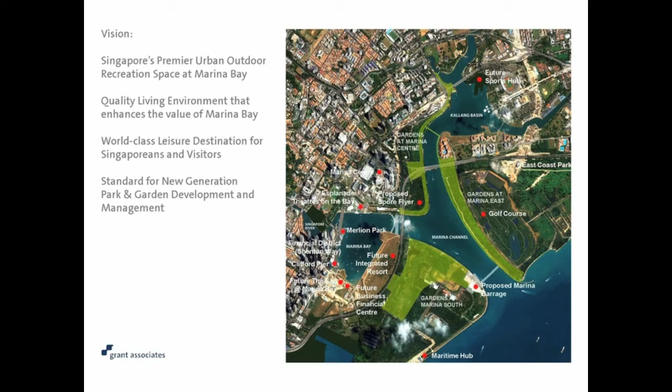The client has set very ambitious objectives for the project. They want it to become one of the premier tropical garden destinations in the world, but also the favourite place for Singaporeans to go as an outdoor recreational space. It's an amazing setting, set in the heart of the new development area of Marina Bay, adjacent to the Marina Bay Sands integrated resort that's recently opened, and the emerging new finance city and future development areas for central Singapore.

From the outset, we knew we wanted to do something very organic and very in tune with the environment of Singapore. After thinking about it very hard, we thought the orchid was a very interesting conceptual reference point for the scheme. The orchid being the most cosmopolitan of species in the world and epiphytic, i.e. it can colonize a place in an interesting, challenging environment.

So we established a series of little diagrams that started to suggest how the orchid as a reference could structure the gardens. The idea of the infrastructure taking root on this new bit of reclaimed land, the stems growing from that to become the path network and linking to the city, and then the flowers themselves becoming the special gardens.

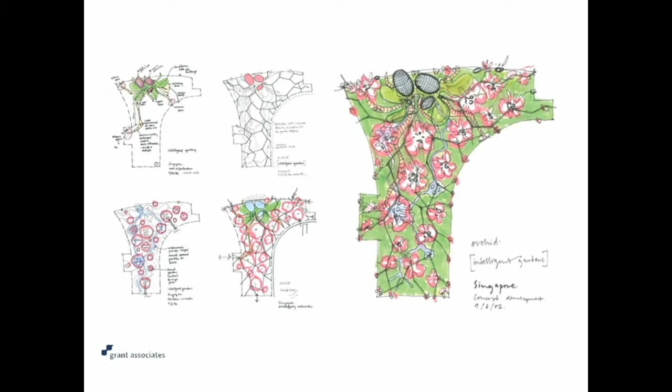Slide 4 shows you a very early quick sketch showing how this might actually work its way through the garden. The overall size of the garden is 54 hectares, so we have a lot of space to use and to generate a very interesting, rich mix of activities within the park.

This ranged from more traditional things like big open spaces, walks through beautiful gardens, lots of shaded walkways. But right on the waterfront, there are two shell-shaped buildings, the landmark buildings for the project. Two air-conditioned conservatories which would support plants from the Mediterranean world and plants from the cloud mountain environment of the tropics. These would become key elements in the project.

Slide 5 shows the competition layout for the project and how that early concept had taken root in the scheme. The green leafy shapes indicate earthworks which start to define spaces and shape and nurture breezeways through the site. And you can see clearly the pathway network and the series of gardens arranged around the site.

A very important part of it was the linkages to the rest of the city and the idea of using water in an imaginative way. There's a 1 kilometre long lake along the western edge of the site, creating an amazing new setting for the emerging development on that side of the project. On the eastern side you can see a little spiral building, the Marina Barrage, and basically the whole of the Marina Bay environment has been becoming a freshwater reservoir for Singapore. So this project plugs into that, as part of the overall environmental improvement strategies for this part of Singapore.

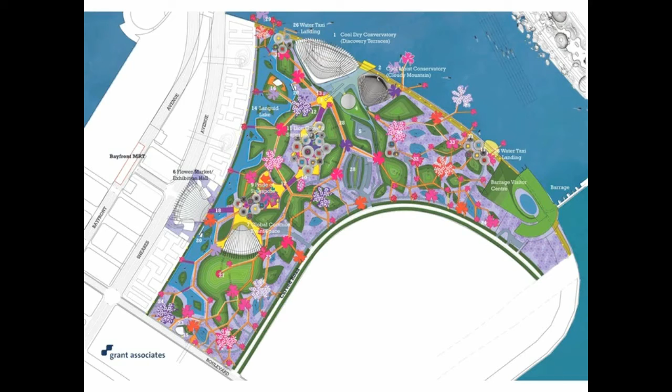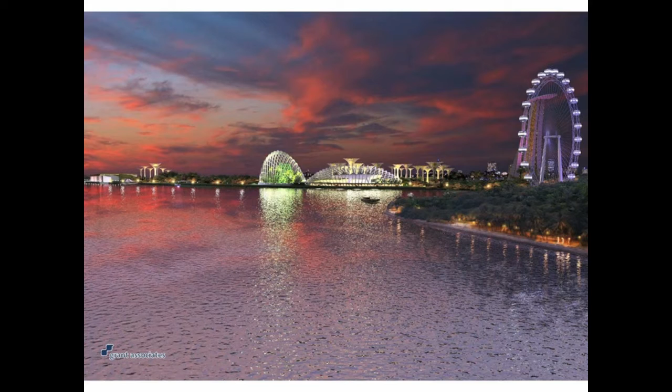Slide 8 shows how these new amazing structures might appear on the skyline at night. Nighttime is a really important part of the environment and experience of Singapore - it's a little bit cooler, people walk and get outside a little more and enjoy going for walks or dinner or having some drinks. We wanted to create a destination that everybody would want to go to.

Slide 9 is a diagram of the ecosystem for this project. This is an early sketch we did to start exploring how we could tie and integrate some of the environmental systems together on this project.

It seemed very fundamental to us that the idea of an air-conditioned conservatory in the tropics was going to be a challenging issue from a sustainability point of view. At the same time, we could see it had the potential to generate new ideas and new approaches to how you condition major buildings.

The brief was that this building should not use any more energy than a conventional office building of the same size. So Atelier Ten, our environmental engineers, looked at this with us to find some innovative solutions, and also a way of making the gardens work with the buildings. There's some really integrated systems going on, and we'll talk about that a little more later in the presentation.

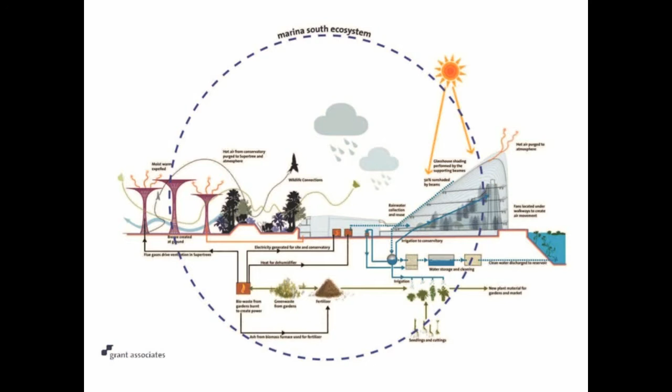The master plan evolved to create a much more balanced approach to the way the path networks and main spaces work, but still keeping that original concept, the idea of the orchid underlying the whole approach to the project.

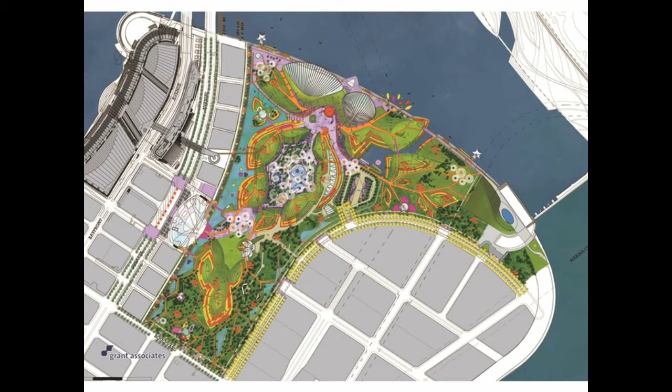On this plan, slide number 10, you'll see the 2 conservatories by the waterfront, and then 3 or 4 clusters of circles, which are the Supertrees. They're becoming some landmark orientation devices in the plan.

Slide 11 became a very significant image for us, because what we wanted to do was embed some significance in the way the gardens developed and the narratives that were underlying them.

The red areas represent plants and people, the idea of ethnobotany and exploring the association of plants with the different cultures of Singapore. The green areas, plants and planet, the idea that we want to explore a Southeast Asian rainforest.

We really want to unlock and display the wonderful plants and phenomena and special features of such a forest, from biodiversity all the way through to the fruits and flowers and significance of trees. The orange spine is that fusion between nature, art, and technology, of which the Supertrees become a very particular icon.

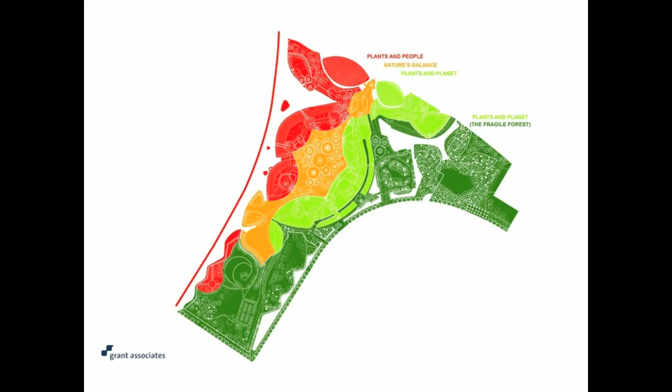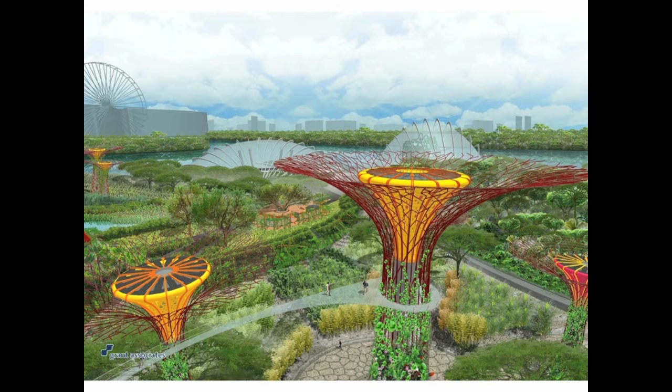Slide 13 starts to show how some of these things work together. Similarly on slide 14, how these major structures sit within a new landscape.

We're going to talk a little about the conservatories now, slides 15 through to 19 - really just a series of images that show how the conservatories sit on the waterfront, and how the identity of the landscape behind and within the conservatories becomes a very important part of the language of the site.

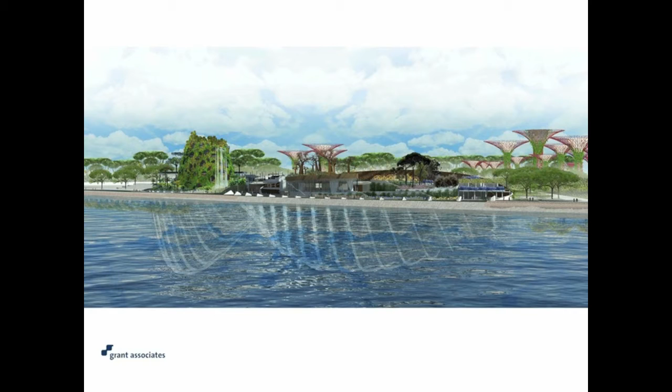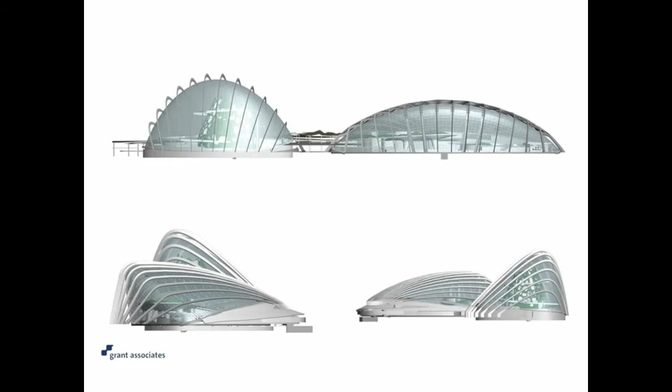The architects for the conservatories are Wilkinson Eyre Architects in the UK, and they've come up with these amazing, beautiful forms, which are a response to trying to maximise the light that gets into the conservatory, while minimising the structural elements that enclose it, and trying to give each conservatory a different character.

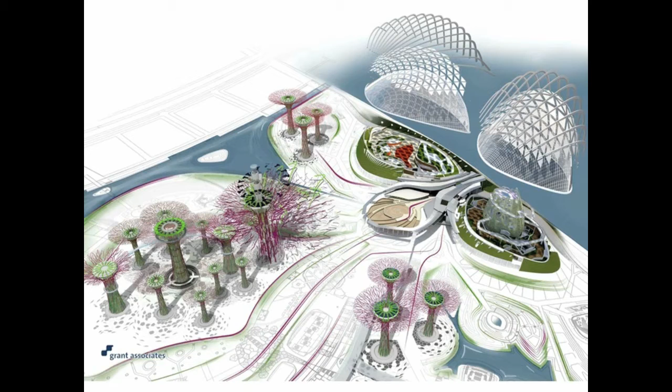Slide 19 shows how we began to draw the relationships between the conservatories and the gardens, specifically the conservatories and the Supertrees, and you can start to see some of the richness of the elements that are within that.

Slide 20 is the engineer's version of our early concept plan, which starts to set out how the energy systems work. I don't have real time to explain all of the technologies, but suffice to say there's some very interesting energy efficient systems in here.

The engineers are pretty confident that the running of the cooled conservatories is effectively a carbon neutral process, principally using a biomass fuel system taken from tree clippings from the rest of Singapore, and enhanced by some of the environmental systems on the Supertrees, including photovoltaics and rainwater harvesting, etc.

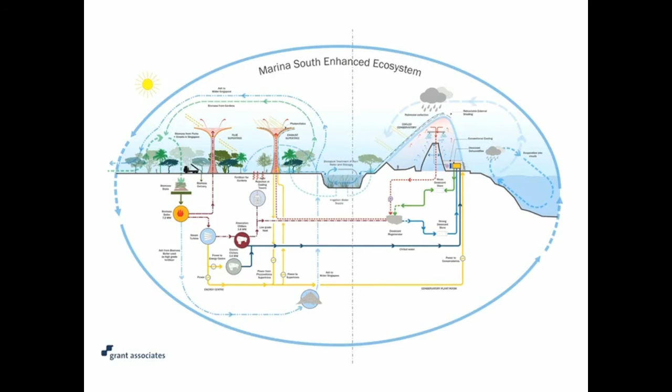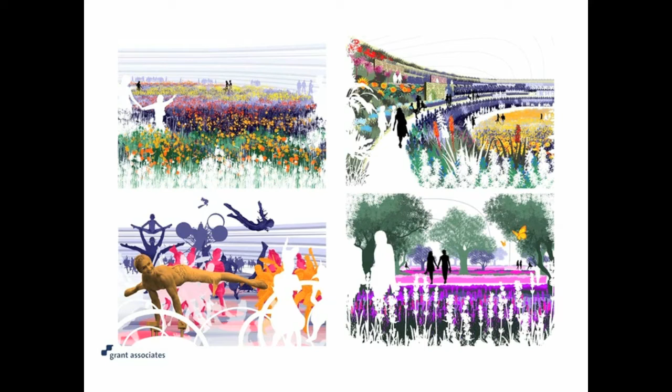Slides 22 through to 24 start to illustrate how some of these early concepts worked.

Slide 24 shows the idea that the interior of the cool dry set out a series of themed terraces developed around particular regions, including the Mediterranean, California, Chile, South Africa, and particularly an element, a collection of baobabs and other bottle trees from different parts of the world on the baobab leaf, elevated above a main function space.

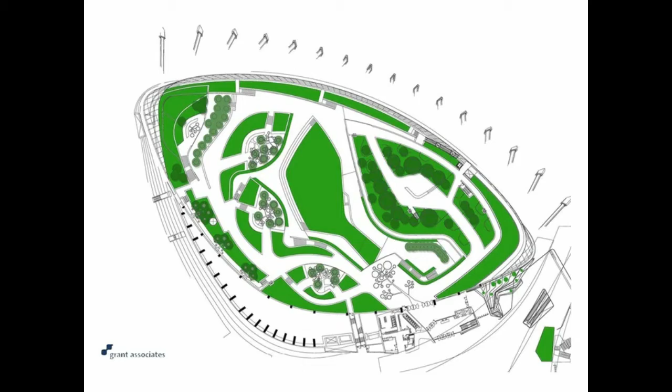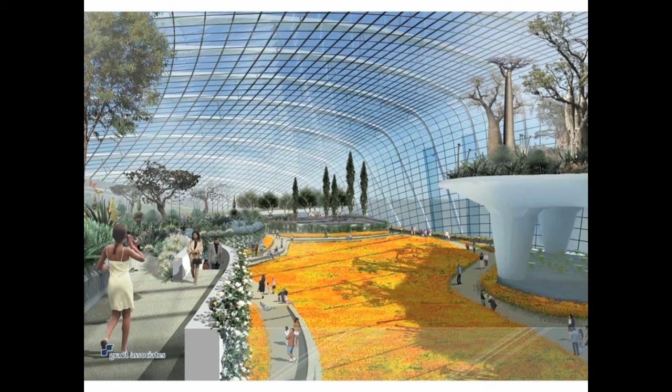That's illustrated on slides 25, 26 and 27. The heart of the site of the Cool Dry is a flower field, the opportunity for a changing display of flowers within the heart of this amazing structure. Slide 28 shows the baobab leaf, an amazing collection of plants from that part of the world. 29 is the olive terrace, plants from the true Mediterranean.

Slide 30 shows the baobab leaf elevated above the flower field. 31, 32, 33 are some recent images of the planting going into the Cool Dry Conservatory, some of the amazing specimens that NParks have brought from around the world, all starting to take shape.

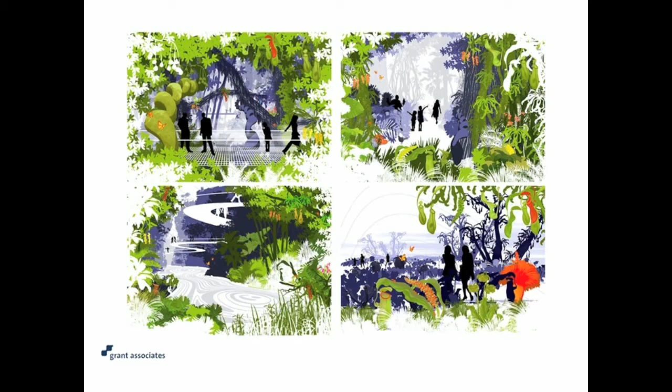Slide 34 starts the story of the Cool Moist Conservatory, which is more about cloud forest plants from tropical montane areas. Both the Mediterranean zones and the tropical cloud forest zones are very threatened habitats, and that's one of the ideas the National Parks Board had, to find a way of displaying plants from these very threatened, fragile environments.

Some of the early sketches are identified on slide 35, and on 36 you can start to see the organisation of the interior of the Cool Moist Conservatory.

Between them, the two conservatories cover around 2 hectares in area. The Cool Moist is a little smaller in footprint but a bit taller, because at the heart of it is a mountain, an artificial mountain on which we want to display the amazing world of epiphytes from cloud forest environments.

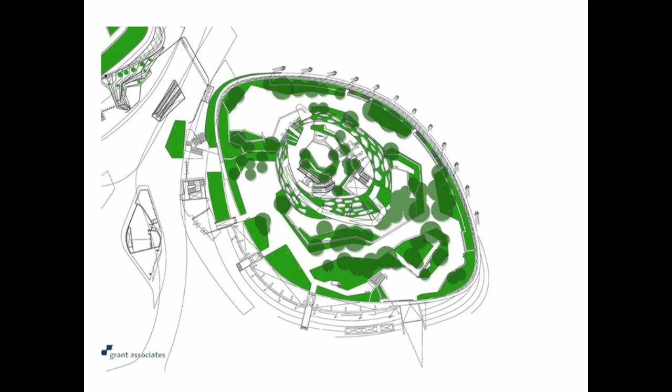But also, you can see on slide 37 the idea that we want to show the profile of a rainforest from these areas, show the different canopy layers, and take elevated walkways through these spaces so that people can really appreciate them.

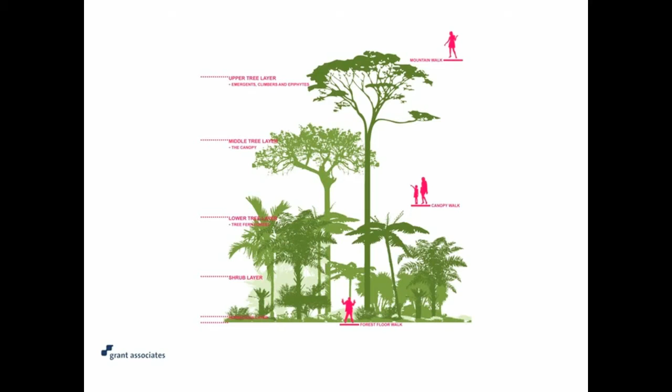And 38 starts to introduce you to the mountain, the idea that at the heart of this Cool Moist Conservatory is this quite significant structure, which is almost like a building in terms of its interior organization. It's actually a gallery space, a circulation structure.

With multimedia displays and interpretation of these environments going on within the various rooms and structures within there, but clothed in this amazing lattice structure, covered with green, multicolored epiphytic plants, and a big garden on top called the Lost World.

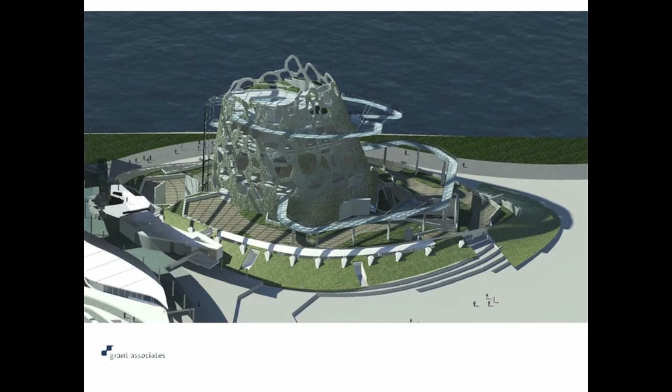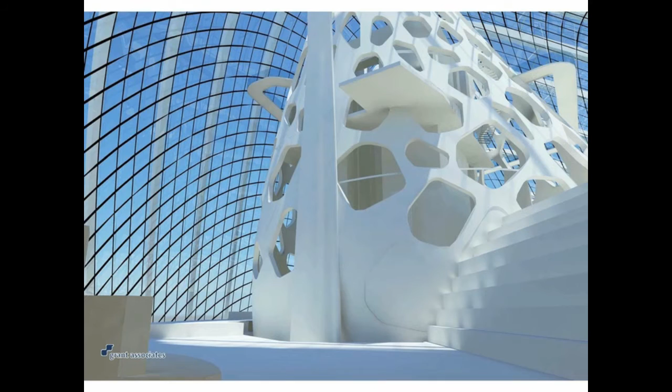So the next few slides start to show some elements of this structure. 39 and 40 show the basic skeleton of the conservatory and the mountain. 42, 43, 44 begin to show different parts of how the skin, the life, the planting is envisaged on that.

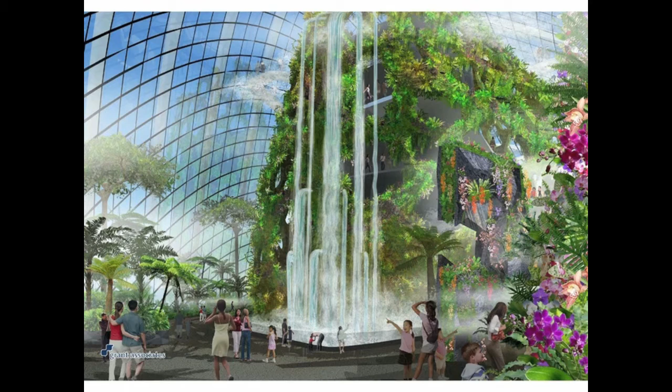From the outset we recognised that this was a very significant technical challenge, and one of the incredible things we have to do is find a way of clothing this mountain with plants, which we'll go on to in a minute.

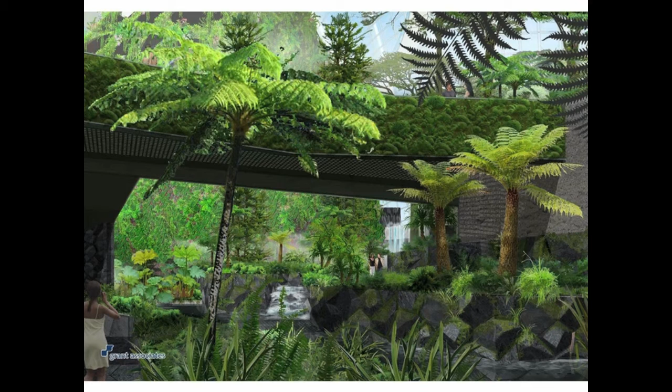Slide 43 is an image of the top of the mountain, the Lost World, where we imagine the opportunity to really create something very unusual and take people into a world of plants, possibly pitcher plants, possibly other species from the top of a mountain in a tropical montane area.

Slide 44 introduces the conceptual origin of the mountain. We didn't want to just make a GRP lump with some plants on it. We wanted to do something really interesting, the idea of a very efficient structure, so it wasn't 100% just concrete or structural, something that actually allowed us to create a structural lattice, but with enough surface area on that lattice to show off the planting.

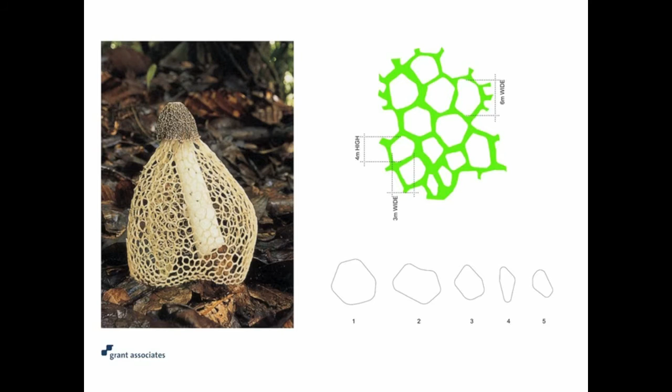The shape of the mountain, what form we wanted, the scale of it, took a lot of developing. So 45 and 46 start to indicate some of the early technical studies of how this worked, taking the idea of the lattice structure and turning it into a three-dimensional idea.

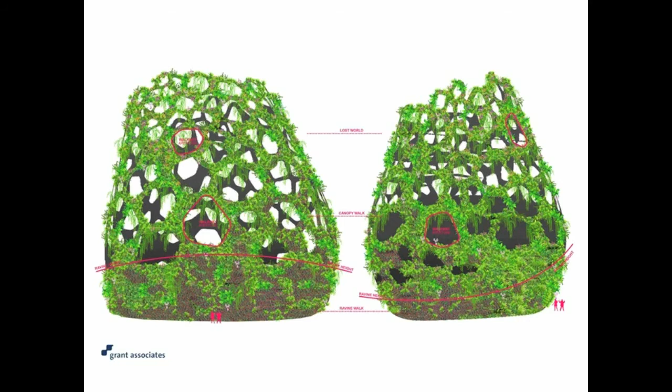But also we wanted to make sure that it was working from the interior spaces too, so how do we make sure that the organisation of the mountain itself worked.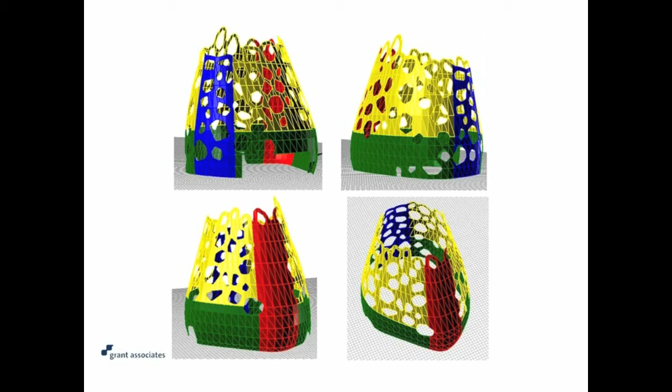The waterfall dropping down from the Lost World to the bottom, about 35 meters, also needed something different in its approach. Slide 50 is like a peeled open version of the mountain.

We were looking at different techniques for how we could actually plant this, and after thinking carefully, since it's a very large surface area, we needed a relatively low-tech solution. Rather than a high intensity panelized system, which would be very hard to fabricate to fit the geometries of this 3D organic structure, we thought we'd make it much simpler.

Various places in Singapore, particularly the Botanic Gardens, have been experimenting with what we call a render solution. It's an organic, rich render with lots of porosity, allowing rooting into the surface and moisture retention. That seemed to us to be a good way of starting.

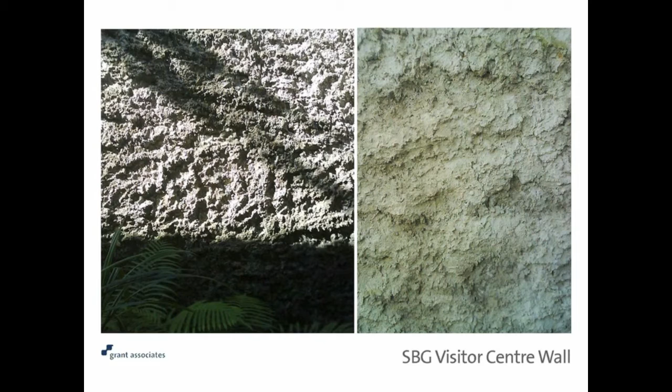Slide 54 shows a range of different planting options. In addition to the render itself, we could imagine a series of planting pockets and little planting devices within and around the lattice holes, giving us an extra dimension, sometimes allowing even small trees or large shrubs to be planted in some of the holes and planters.

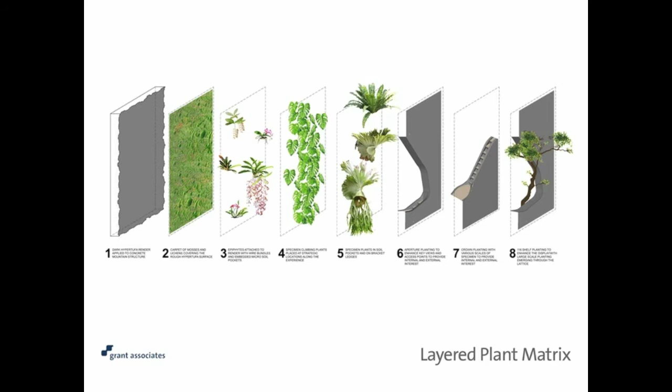Slide 56 through to 57 start to show some of the images we were trying to get across, the idea of epiphytes, the idea of a lot of moss, and how we start to articulate that in the structure.

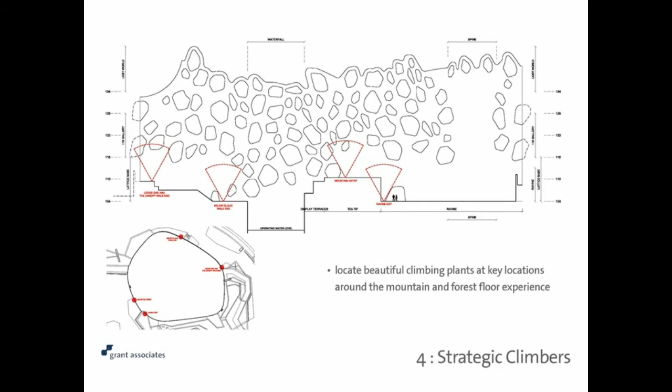In addition to that basic skin, we wanted to start clothing it, allowing other plants to colonize. We recognised the potential for using plants that can climb up from the base and clothe parts of the mountain. Slide 58 shows particular strategic locations we identified to allow that to happen.

Soil pockets on the mountain allow us to put in some of the bigger epiphytes, some of the big bromeliads. One of the amazing things NParks managed to do is source an extraordinary collection of bromeliads from around the world, many species, and we think we can really show these off in certain parts of this project.

Once again taking inspiration from nature, slide 61 shows the idea of brackets, fungi brackets, which allow us to support different plants.

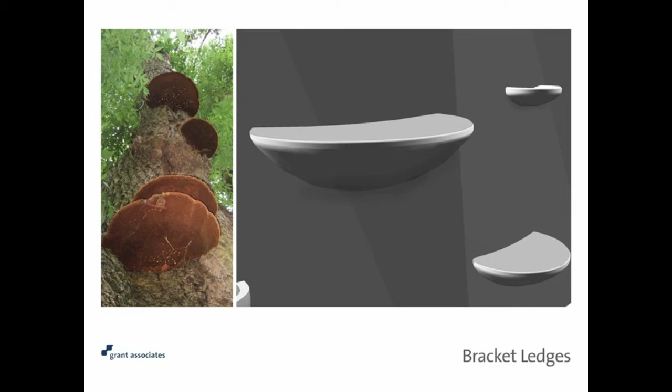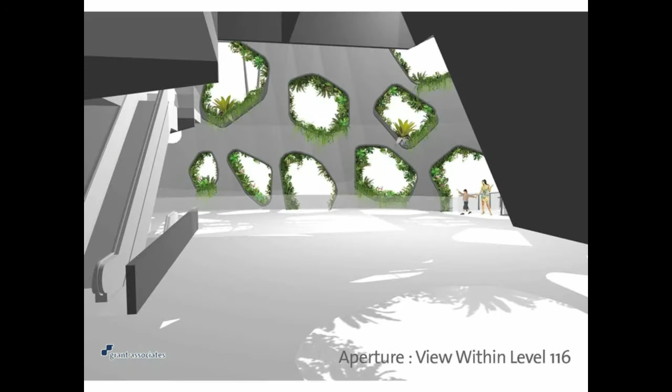Bringing the apertures to life around the lattice holes was a very important objective. Slide 63 shows an image from inside the mountain looking out. We wanted to really bring life to those spaces so that they had a very particular character.

With a bit of backlighting, you can really start to show off some of these amazing plants, as in slide 64 and 65.

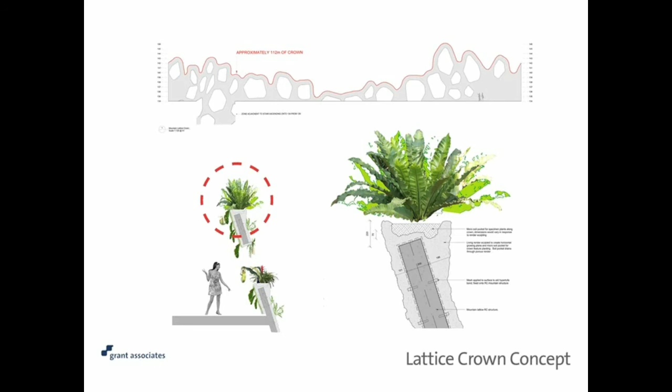Slide 66 shows some of the ideas of creating troughs on the top of the mountain or in some of the bases of these apertures to provide planting for certain species, including some of the larger plants, possibly some of the rhododendron species, etc.

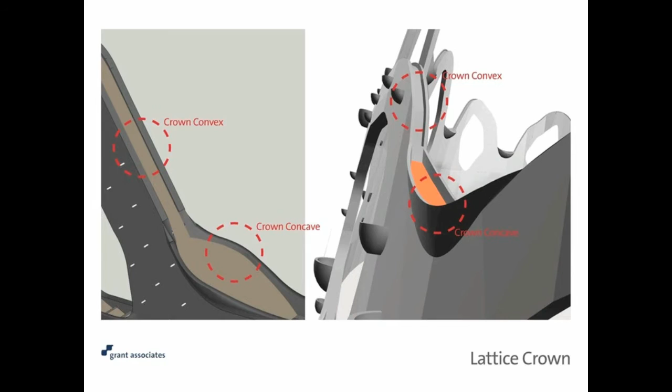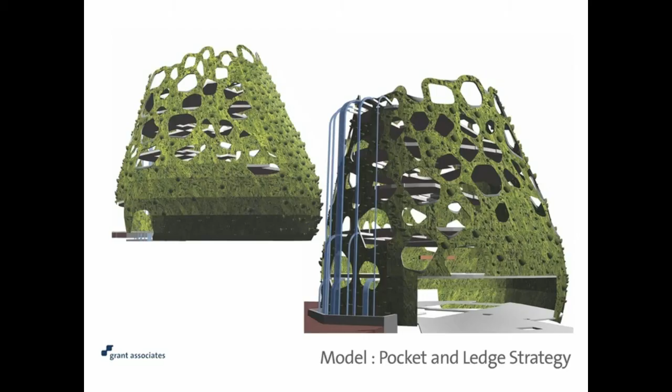Slide 68 starts to show how technical this was becoming. We wanted to really get into exploring the diversity of what we can do on this amazing structure.

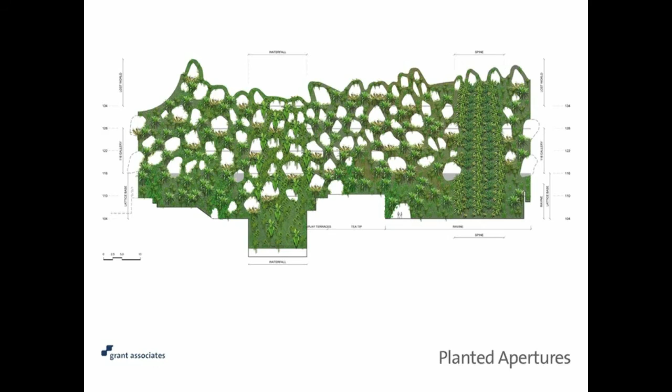If you run through the slides from 69 all the way to 78, you will see how the planting story builds up, the idea of different parts of the mountain having different characters, different elements colonizing different parts of it, and all together becoming this amazing rich clothing to this extraordinary structure.

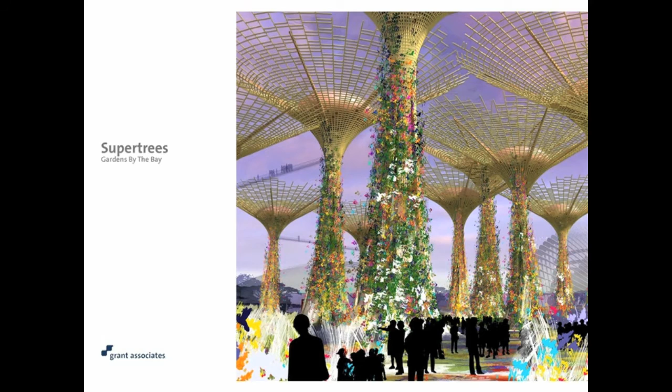Slide 82 introduces the Supertrees. Similarly challenging is the idea of creating something of this scale, making vertical gardens that go up 30 to 40 meters in the air, and embedding all of these environmental systems into it.

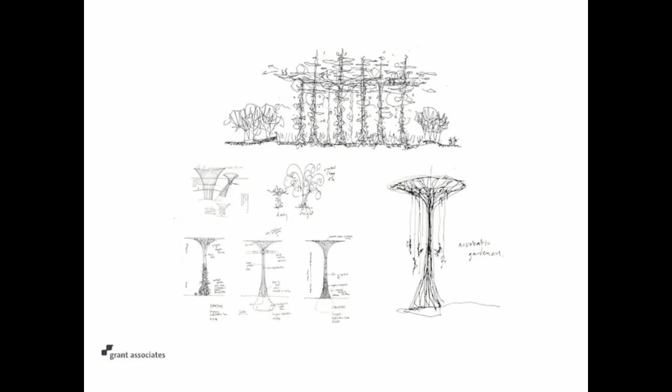It's been an extraordinary journey, and the starting point is: where did the idea come from? A combination of things. We knew we needed something very tall to be an appropriate scale counterpoint to the conservatories, and we were exploring structures 40, 50, 60 meters high at the competition stage. That was consistent with an experience I had in southwest Australia, the Valley of the Giants, where you have a walkway through the karri trees, 40 to 50 meters up, through these amazing massive eucalyptus trees.

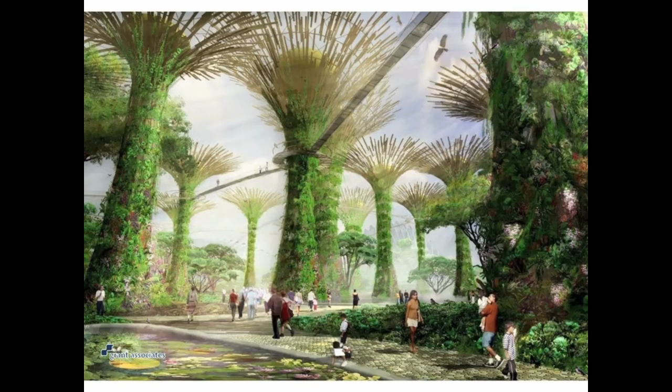So we thought that would be a really interesting experience. How do we create something magical that's that high, but also bring a sense of technology and the digital world, the sci-fi world of things we're beginning to see? That fusion of nature, technology, structures, fun, doing something that's never been seen before, was really behind the whole idea.

Slides 85 and 86 capture some of the early thoughts we had for the scale of these things and the otherworldliness of the space we could imagine around them. During the day, amazing vertical gardens and garden environments at ground level, with aerial walkways exploring the top. At night, the idea of an amazing night show makes it magical. Creating somewhere you would not experience anywhere else was a very important part of what we were trying to do.

At the same time, we gave each of these Supertrees a job. They have an environmental function for the whole project, whether rainwater harvesting, exhaust venting for the conservatories, or having photovoltaics on top. That's a very important objective, illustrated on slide 87.

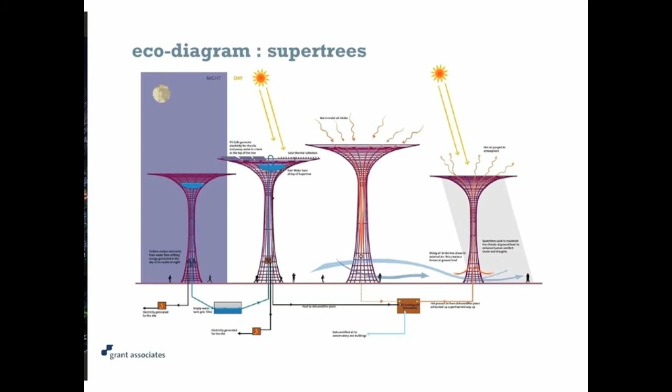Slides 88 through 92 start to show how this family of Supertrees began to emerge: clusters of trees ranging in height from 25 to 50 meters, each having a different job—some PVs, some exhaust, some solar thermal panels. A very important part of the process.

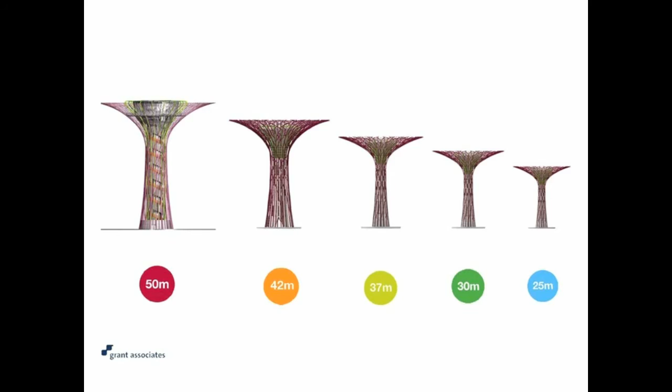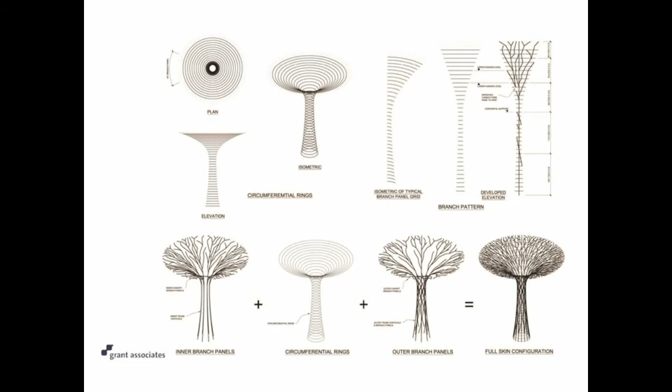The design of them evolved through many iterations working with the engineers. The structural engineers for both the conservatories and the Supertrees are Atelier One, and to be honest, they've been fundamental to finding the form and structure of these amazing pieces in the landscape.

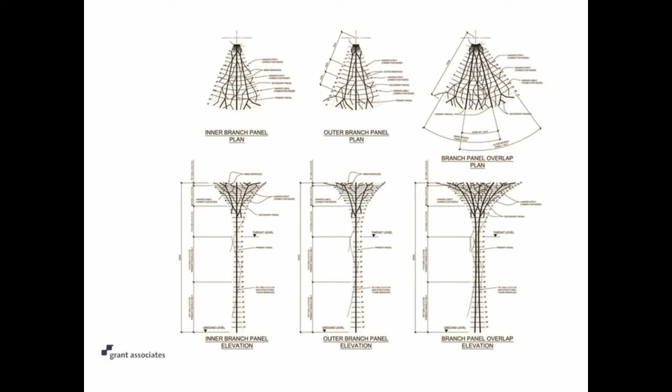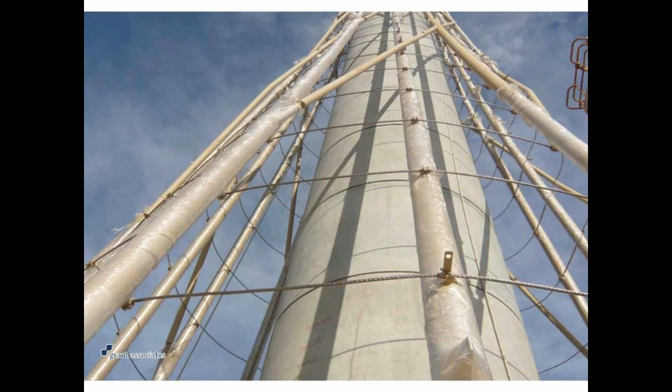Slides 94 through 96 show some early construction shots of how this basic structure comes to life. The heart of the Supertree is effectively a concrete column, with steel members forming the trunk and canopy. The clever thing is it looks totally random, but it's actually a repeated pattern of two or three elements wrapped around the core of the Supertree.

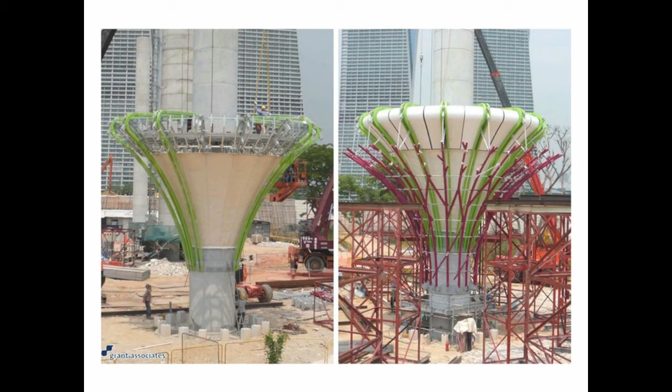The Supertree head, which looks much like a poppy head or poppy seed head, essentially supports the environmental infrastructure. It's also the place we can play with lighting at night time, and it forms a very important part of the identity of the Supertrees when looked down on from above.

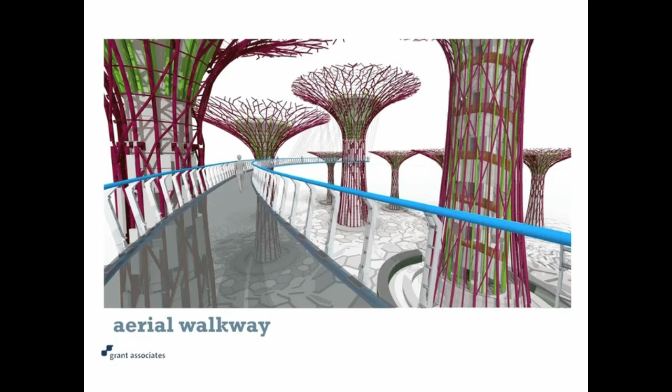Slide 98 introduces the aerial walkway. From below, these things are spectacular, but we knew that having people walk up close through the canopy area, getting near high-level bromeliads, tiger orchids, and other amazing tropical plants, would be a really important part of it—as well as looking down on our gardens.

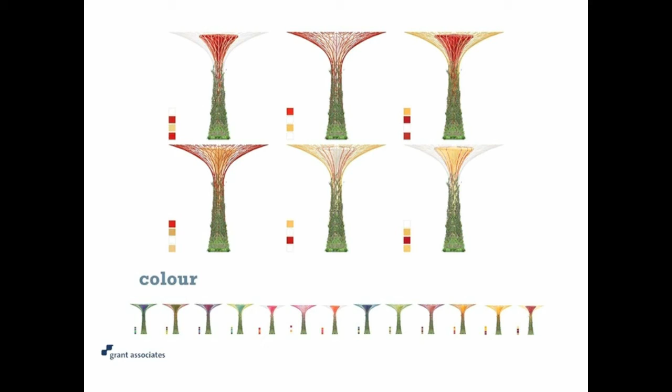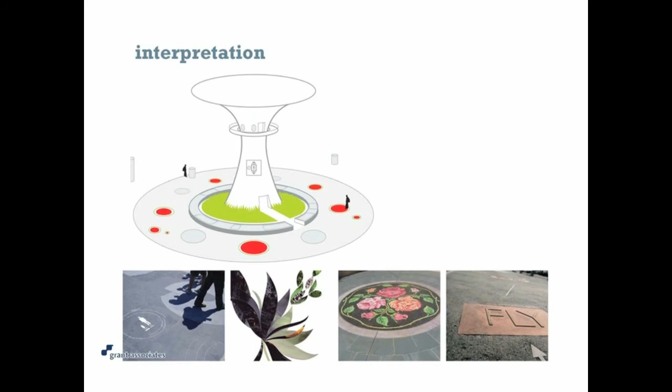There's a lot of time spent looking at how the colour works, the aesthetics, the form, the shape, and the three-dimensional organisation. Slides 99, 100 and 101 start to show how we began to look at different elements—it's not just about the planting or the structure. We started to talk about the stories behind that.

Now back to the planting. This is a really important part of the whole process. And from the outset we realized that we didn't really want to have just one solution for all the super trees. There were three main clusters of super trees.

One in the central space, which we call the Lion Grove, now known as the Super Tree Grove, and that had to come across as an absolutely rich, dripping, tropical garden display. There's another garden cluster associated with some silver planting, we call it the silver leaf, and so we needed the plants there to reflect that. Similarly, in the rival garden, called the golden garden, we wanted something of the rainforest, something very evocative that started to display plants of the Southeast Asian environment.

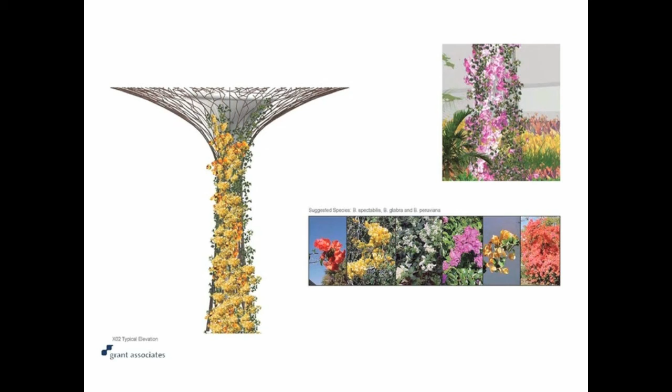So different clusters, we began to think of them in different ways. 113 starts to suggest the sort of central rich tropical mix. 114 suggests a slightly different approach to the silver leaf, perhaps using climbing bougainvilleas, tillandsias and silver epiphytic plants. 115 starts to think about more tropical jungle vines and lianas creeping up the structure.

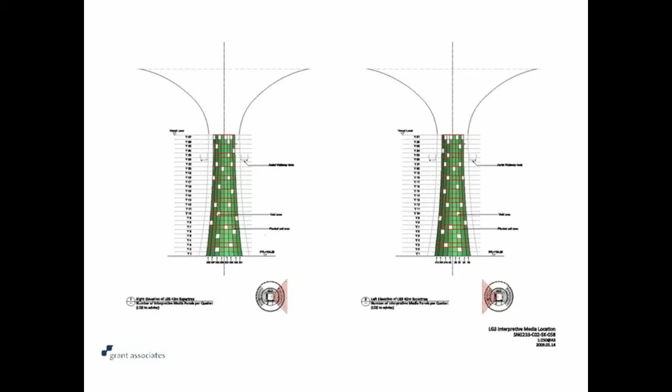A planting strategy was evolved for each tree having its own personality, and 117 through 119 start to show different qualities being looked at for the Supertrees. Just as the mountain, recognizing that different parts of the tree had different environments, different proximity to people, and opportunities for doing different things at different scales. That's one of the things we've been really exploring quite hard.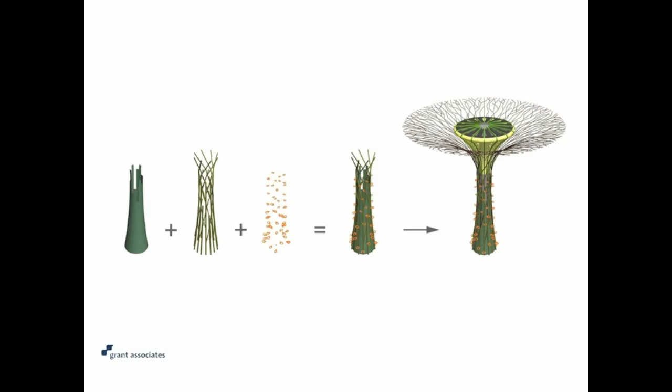120 starts to show some of the devices we've been exploring for supporting planting. 120 through 123 illustrate some of the early sketches for thinking about how do we plant up the main trunk columns, how do we support plants on a panelized system, that unified, simplified panel system that works with the super tree structure.

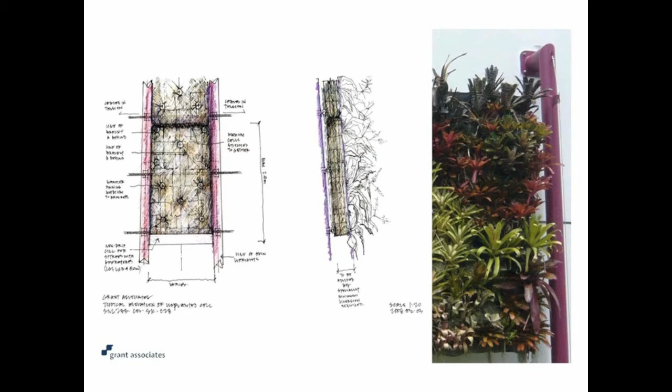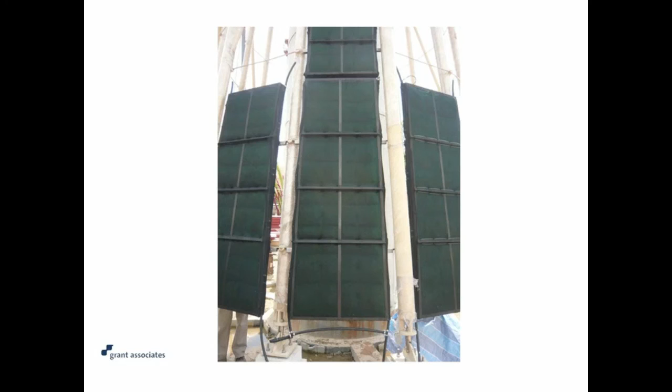Then as you get down into 124 through 126, some early shots of some of the mock-ups and trials of some of the systems we applied. In essence, it's a panelized system with an inert substrate captured within it, all clipped onto the basic super tree structure, with an irrigation network integrated within all of that, hidden away, so that everything is totally integrated and works as part of the mechanism for the tree.

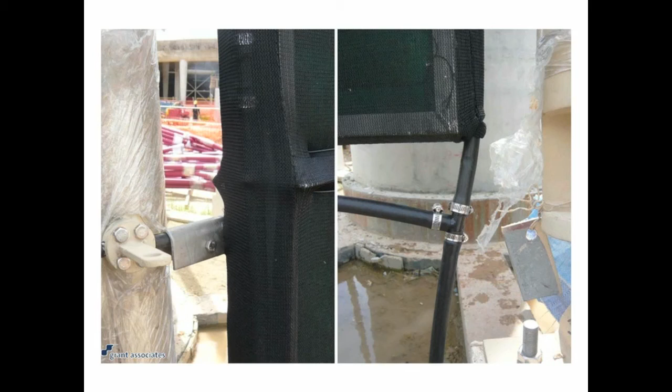127 and 128 start to show some of the early mock-ups of planting, using some of the amazing bromeliad collection. 127 is interesting because it shows a mix of the panels we were using. For some of the trees, particularly in the silver garden, we thought it appropriate, rather than having a very intensive system of panels and irrigation, to use an open mesh system with tillandsias and air plants to provide the planting element. Still adding some irrigation in there as well, but much less intensive use of the infrastructure.

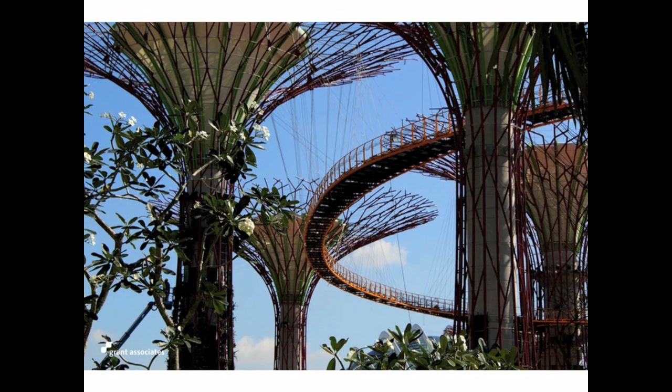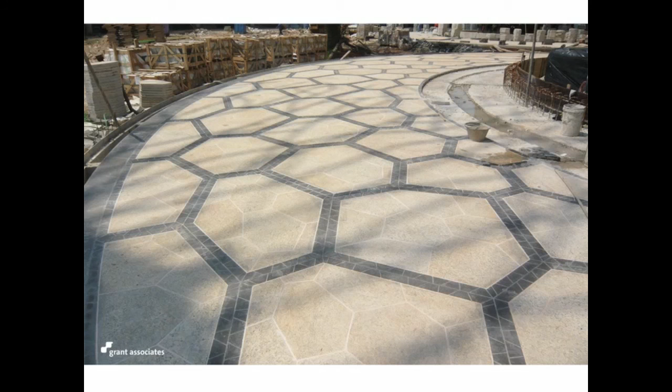129 through 137 start to show how the super trees are sitting in these amazing gardens. Now, this is August, September 2011. The project isn't due to open until June 2012, so these are still early shots. It's not finished, but you can start to get an idea of the scale and the identity of the super trees and how they fit within the garden experience.

Thank you very much. So in conclusion, this was pretty much a once-in-a-lifetime project for me and the team, I guess. And what it's taught me is that to make these sort of things work, these very complex ideas, you need an amazing set of skills that go with it. We've been very lucky to work with some of the world experts in horticulture, from specialists in bromeliads and orchids all the way through to people who really understand how the technical side of putting these substrate systems together can really work at the scale we've been talking about.

But we also need to remember that we couldn't have done these sort of things without amazing structural engineering and architectural skills that went into it. And last but not least, the client has been a fundamental part of the design process, not only allowing us to get on with this and develop these ideas, but also being very much a party to the process and helping us steer our way to making it an amazing success.